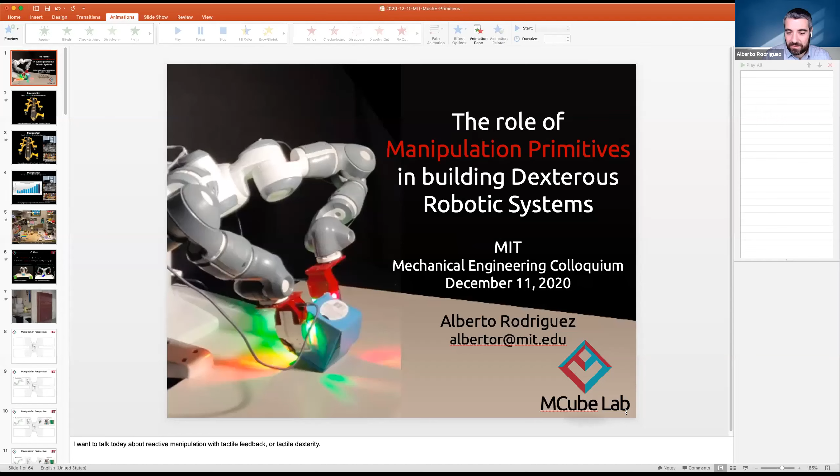All right. Thank you, everyone, for joining. And I hope that you are as excited as I am about the end of the semester, how close we are. And I hope that you all have some time to recover energy through this well-deserved break that is just around the corner. So today I wanted to have a chance to talk a little bit about manipulation.

I will show some of the latest work that we've been doing in my group in the MCube lab. And before that, I will also spend a little bit of time talking about manipulation in general, my perspective on where we are as a community and some directions that I think are important to explore. In particular, I will talk about manipulation primitives and the role that I think they ought to play in building dexterous robotic systems.

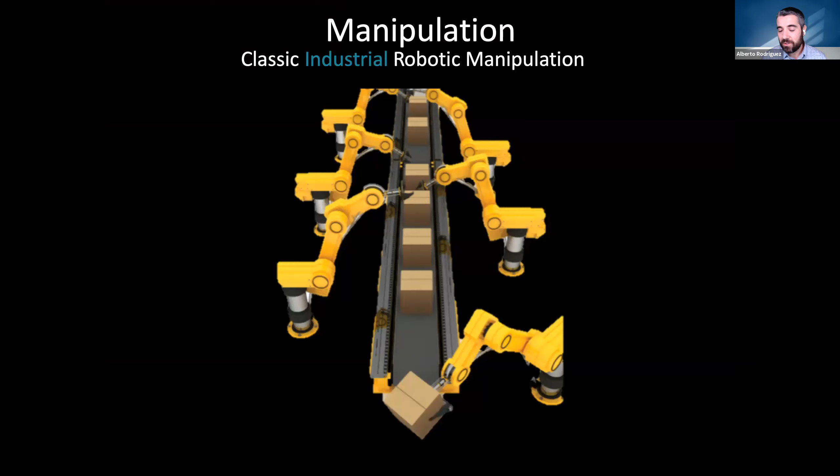Okay, so robotic manipulation, if we look at classical industrial applications, has for the most part been exploited or understood as the idea of picking up objects one by one and putting them from here to there in a very precise way and with high efficiency, but still moving objects one by one.

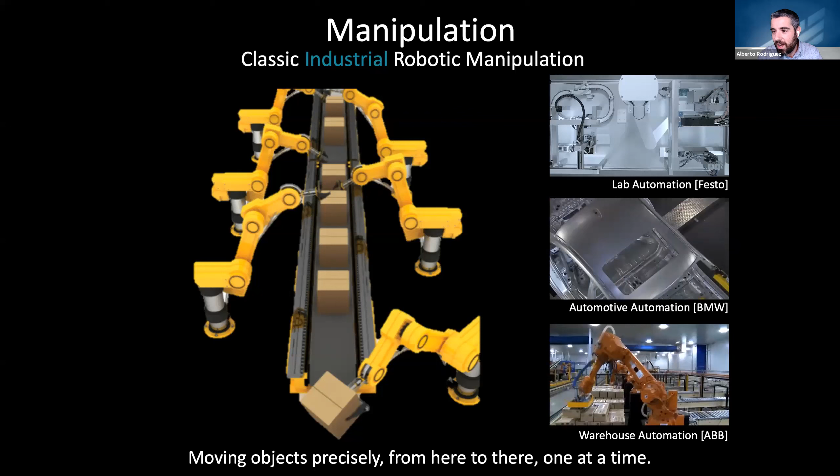So here are some examples in the context of lab automation, automotive automation, and warehouse automation, where in all of them, the idea is that these robots are doing almost exactly the same thing all the time.

And this perspective has been extremely successful, right? So we can see here an example, the continuous rise of the number of robotic arms that have been sold in the last decade or more, and it's like a healthy curve.

And while it has been extremely impactful, I think that the idea that we have in our head when you think about manipulation is quite different from the way that these robotic systems are developed or implemented. And one key question is why that's the case? What leads to this particular approach not generating the smooth, flexible, and graceful behavior that we see when we, for example, use our hands?

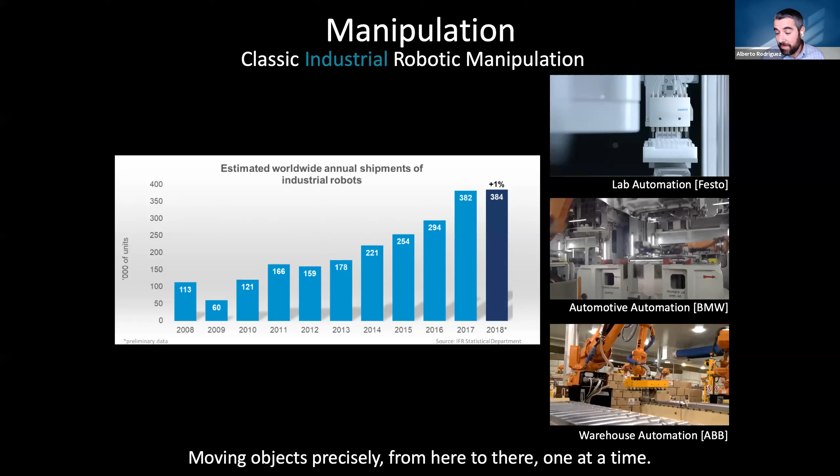In a scenario like this, it's rarely the case where we see two instances that are exactly the same, where you can execute the same behavior. So there's a gigantic amount of flexibility in the way that we're interacting with objects here. And not just flexibility, but it is something that is rewarded, something we seek. The creativity that comes with using our hands in creative ways to bend the world to our will. To me, that is what manipulation is.

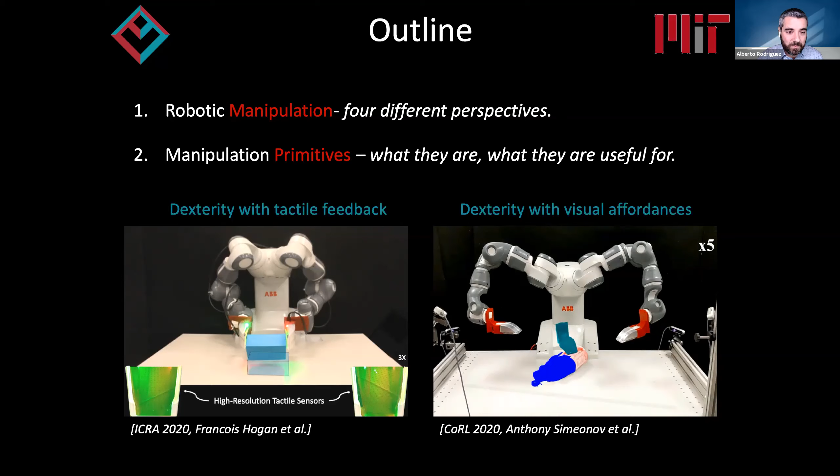I also want to talk about the role that manipulation primitives play in integrating these different perspectives. Then I will describe that in the context of two recent research lines that we've been developing in the MCube lab. Okay, let me move forward.

How come I can do something like this in a completely effortless way without having to think about it, but at the same time with so much grace—not just me, but anyone. When you try to analyze this problem, there's very large complexity in trying to replicate something like this. So today I wanted to use the same example to illustrate these four perspectives.

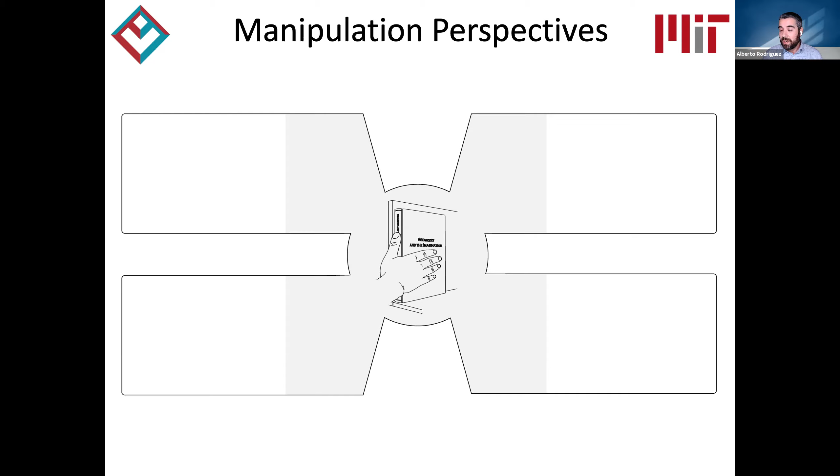So for example, one perspective that the community has embraced is to think about it from a mechanical perspective—from a mechanics and control perspective. We make simplifying assumptions about the geometries and about the laws of mechanics that explain the interaction between the end effector, in this case my palm, and the book. Maybe I can think of my palm as four points or a plane, and the book also as a plane, and it's the interaction between these two planes and maybe a Coulomb friction law.

That I use as a reduced model to then be able to control in a feed-forward fashion the interaction. How do I generate trajectories that bring my simplified representation of the mechanics through the underactuated control that I get from having to exert forces through contact? So that's a significant perspective that has been embraced by the community at large for many decades.

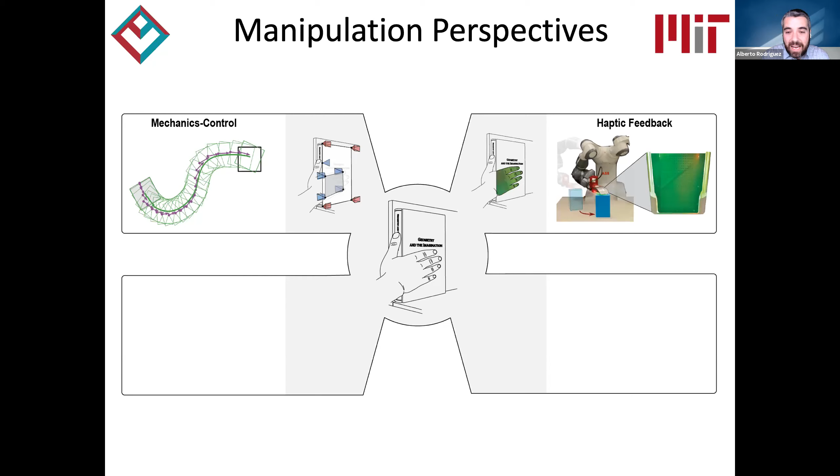But you can also think about this problem of the interaction between the palm and the book from a haptics perspective. Someone might say, well actually what matters here—forget about the model of the mechanics—unless I have the ability to exert forces. If my mechanics tell me yes, you should contact here and exert this force, I don't have the ability to exert that force unless I care about the haptic interaction. How do I render forces through this very complex interaction between a soft object, which is my hand, or semi-soft, and a rigid object that is the book.

A significant part of the community has also thought about manipulation from that perspective: how do you render forces in a highly complex or unmodeled environment? Now we can also think about this problem from a planning perspective. Someone can say actually what really matters here, where the complexity is, is in generating a trajectory, a sequence of actions that bring the book from between those clearly different strata where it's going through.

So first, the book is sliding on the wall, and then it's sort of pivoting maybe about the edge of the shelf, and then finally it's in the grasp. How do I chain a sequence of long horizon decisions that bring the book through that trajectory?

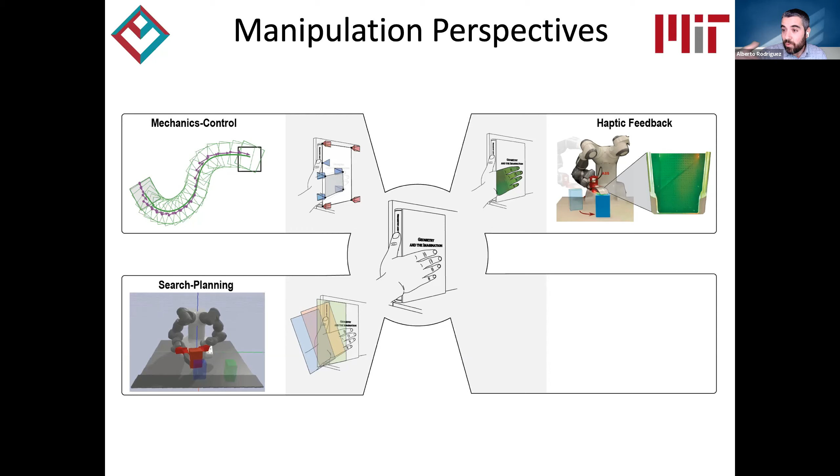And then someone else might say, actually, what really matters about this is that the book is a physical object that lives in the real world, and I don't have a model for it. It's just the perceptual, the visual perception that I get through my eyes. And what tells me that the side of the book is a good place to put the palm, or that the edge of the book is a good place to put my thumb? And definitely that has also been a perspective that has been embraced lately with higher emphasis in the robotics manipulation community.

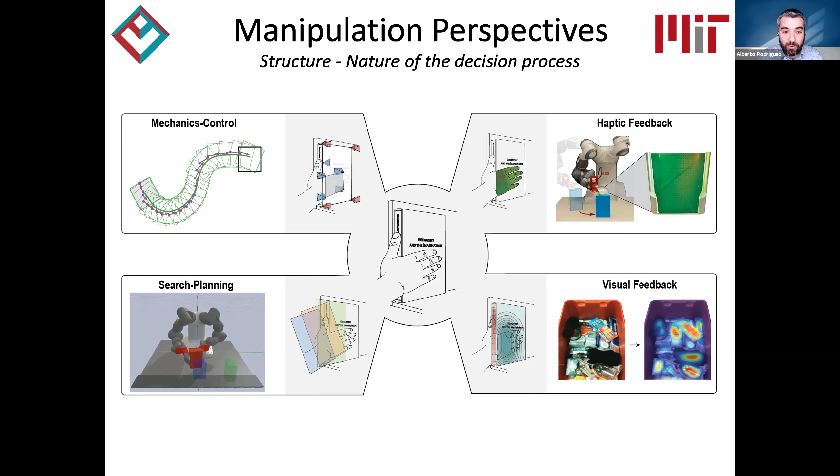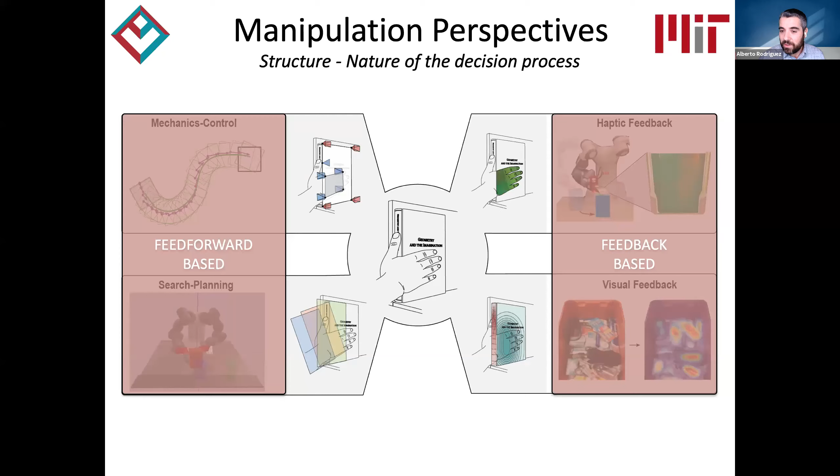Now, you might be thinking, I'm really not saying much new here. So these four perspectives are classical in robotics, and we can structure them, for example, by the nature of the decision process. So here we're just saying that, well, maybe we're just thinking about it from a feed-forward perspective. So I have a model that I can simulate forward, and that is what allows me to make decisions about how to generate behavior. Or I can think about it more from a feedback perspective. So it's in the sensor space where I make my decisions, that's where the information lives that allows me to make those decisions.

Or I can think of this structure from a local versus global perspective. So I might be caring more about the fine-grained interaction between the end-effector and the book, or I might care more about the global state of the task that I'm executing. So there's clear structure associated with these perspectives.

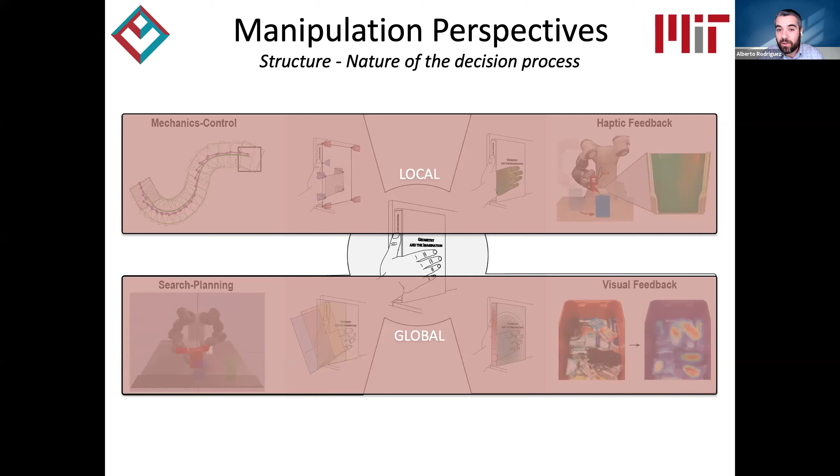I might also structure them from the nature of the challenge that they address. So each one of these perspectives acknowledges that there's, or gets excited by, certain challenging aspects of interaction. So you might get excited by the underactuated and hybrid frictional dynamics that are involved in transmitting forces through contact. Or you might get more excited by the generality that comes from creating long horizon behavior.

So you more naturally would tend to think about a search planning perspective. Or you might get more excited by the challenges involved in generating real forces, in rendering real forces and velocities at contact. Or from the challenges involved in having to manipulate real worlds, where the perception comes from vision.

Or finally, we can also structure these perspectives from a time perspective. So from the nature of the dynamics of research, of how our ideas or ideas in the community evolve over time. We can think of maybe robotic manipulation sort of originating, and actually a lot of the work in this department, in the area of mechanics and control.

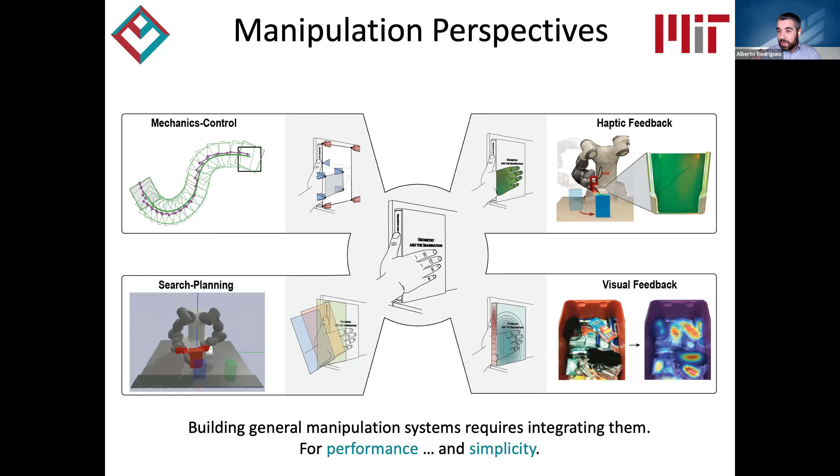Building general manipulation systems requires thinking about all of these at the same time, for performance but also for simplicity. This is where manipulation primitives come in, because by focusing the analysis on specific interactions, they allow us to find synergies between these perspectives and exploit them.

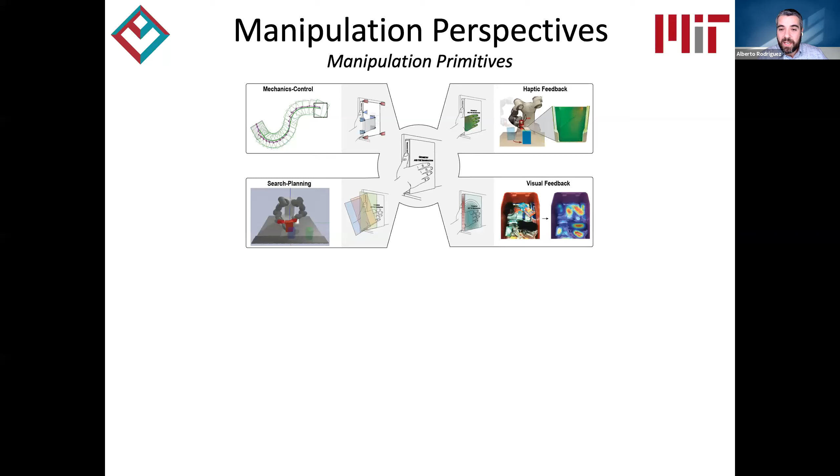All of these are just to put an idea or image of different ways that we can think of interaction, that we can think of generating autonomous behavior through contact, leading to the description of what role manipulation primitives play in solving this challenge. So what's a manipulation primitive?

By focusing on one particular type of interaction, this has naturally allowed these different perspectives to evolve and find implementable solutions. But I want to argue that they also facilitate integration, and that's what I'll go into with two examples of current research in my group.

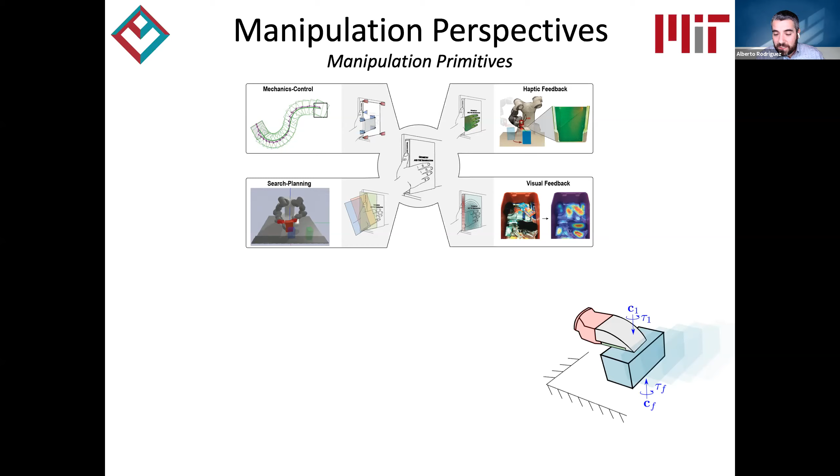If we look at one example of a primitive, let's say pulling an object - what is a primitive? It's an assumption on the contact interaction. In this case, it's a palm contacting an object on top of the object, and the assumption we're making is that the palm is going to be sticking to the object.

That sticking interaction comes with benefits in terms of simplified mechanics and a simplified forward model for the object motion. If I'm making the assumption that there's this rigid sticking interaction between the palm and the object, that reduces the complexity - I can think of the mechanics of the interaction as some form of quasi-static equilibrium. It's the friction between the object and the palm, and the object and the ground, that will eventually determine the motion of the object.

But if the object is sticking to the palm, the force resolution is simplified. From a controls perspective, I can then assume that the motion of the object is a fully actuated kinematic trajectory. I don't need to reason about the hybridness or underactuation involved in transmitting forces through contact, because I'm precisely making that assumption that the object is going to stick to the palm. This also allows us to get simple models on the reachability of what it is that I can achieve with this primitive.

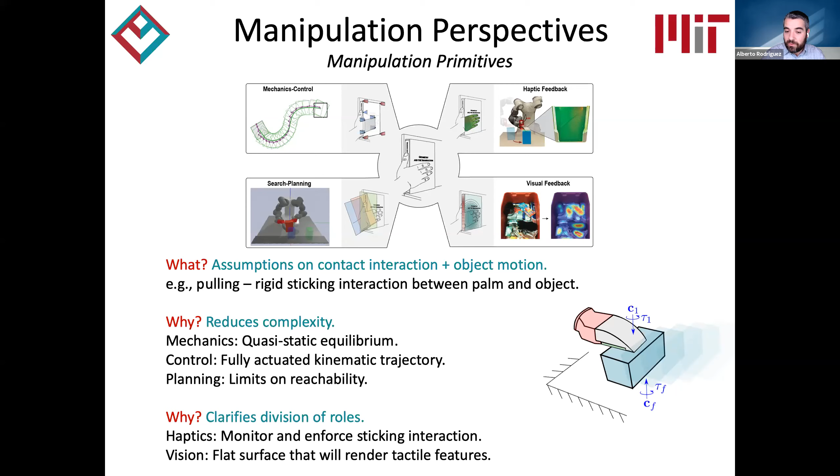And on the other hand, it clarifies the division of roles. If this primitive makes an assumption on the type of contact interaction - maybe a rigid sticking interaction between the palm and the object - then I can directly say that the role of haptics is to monitor and enforce that sticking interaction. I need to develop a haptic controller that makes sure this assumption is satisfied. Then the role of vision is to find places to interact with this object that make it possible for the haptic controller to do its job - in this case, rendering sufficient information to know whether it's sticking or not.

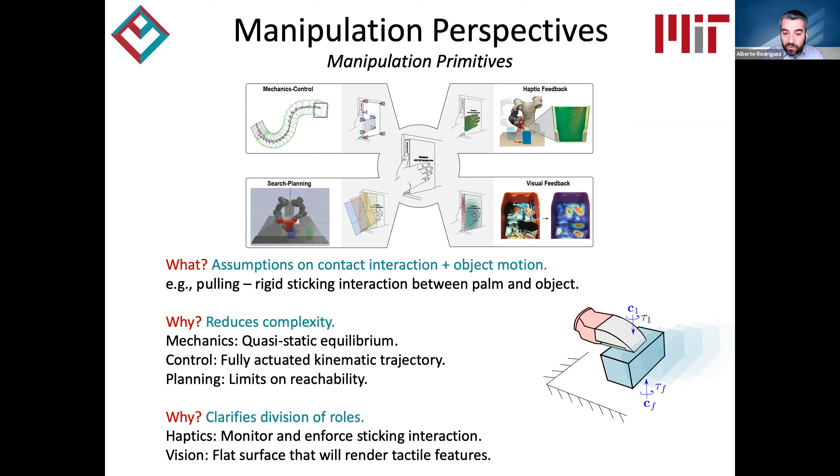So on one hand, it can reduce complexity, and on the other hand, it clarifies this division of roles. So I want to get deeper into this relationship between defining primitive interactions between an end-effector and an object that we're manipulating, and finding integrations between these different perspectives.

First, I will describe recent work that we've done in trying to integrate haptic feedback with mechanics and control, the idea of integrating tactile feedback in dexterous manipulation. So how do we generate dexterous behavior that can consume tactile feedback in real time, and generate reactive behavior?

So dexterity with tactile feedback. The idea is that we want to embed tactile feedback in the mechanics, in the models of mechanics that we use for generating dexterous manipulation. And we start from the definition of what the manipulation primitive is, which is a certain assumption on contact interaction and some expectation on the motion of the object.

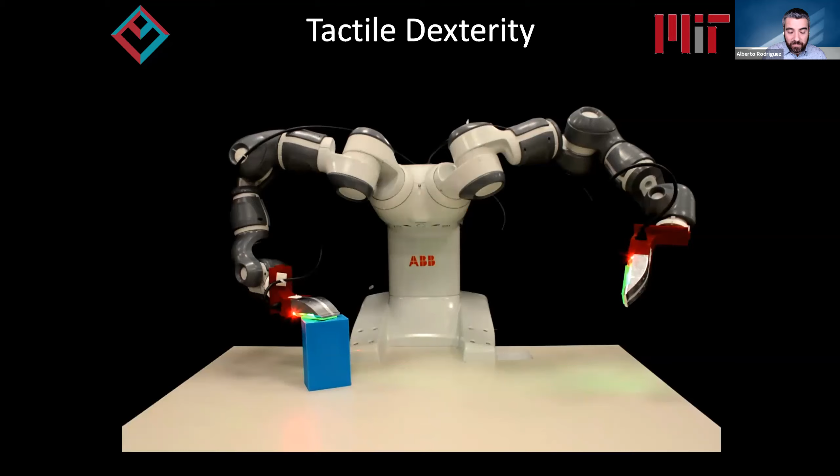The first system I want to use to illustrate this framework is a dual arm system with two palms that have tactile sensors integrated. These are tactile sensors based on GelSight technology. The basic idea is there's a camera inside the palm that is looking at the deformation of the skin of the palm.

By looking at the deformation, we can see either the geometry at contact, or we can estimate the contact forces at the interaction.

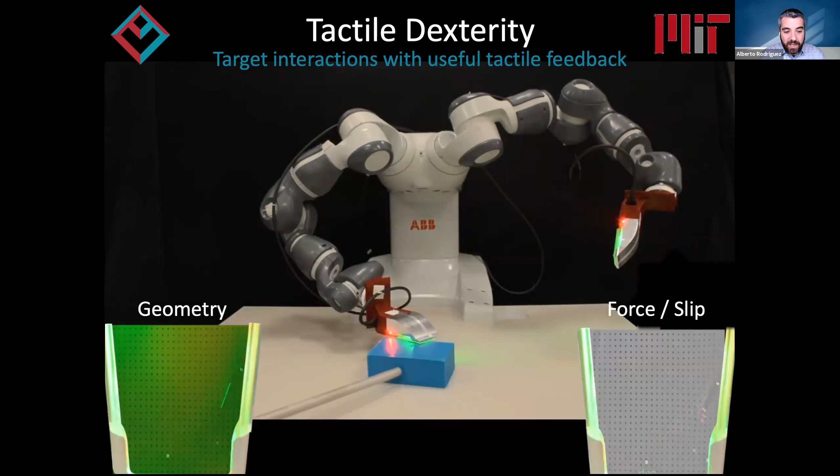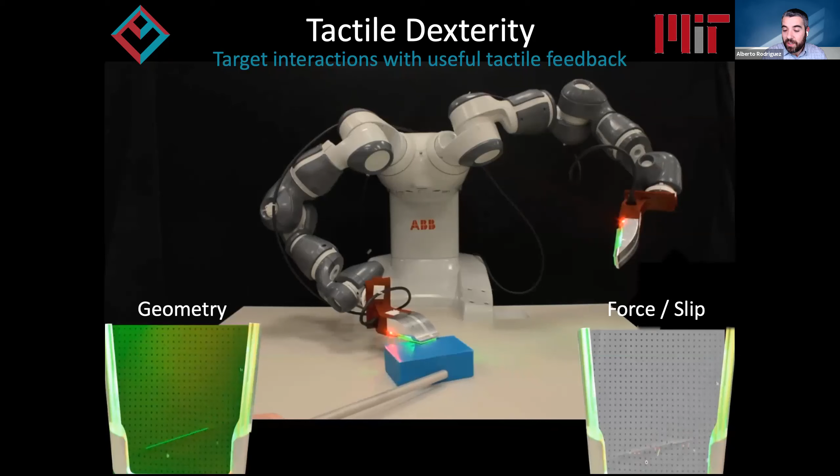Here's an example showing how, in this case, we're just moving the object. On the left, you can see how we estimate, as a simplified scenario, just a line as an edge of the object. On the right-hand side, we can estimate the stress or shear forces on the skin of the sensor, and with that, understand whether it is slipping or not.

So we can think of this problem: if the goal is to bring the object to a particular configuration, in this case the blue box, to the shaded blue box, how do we generate motion for the robot arm? This is a hierarchical problem where we need to think about generating arm trajectories that move the palm, and then palm trajectories that move the object.

Now I'm going to focus just on the interaction between the palm and the object. The idea is that this is the same primitive we described before, just pulling the object, and we're going to assume that the palm is going to stick to the object.

So the contact state controller on the right will be in charge of tracking whether the object is sticking or sliding on the palm. And depending on whether it's about to slip or not, it will control the normal force, or the force that is applied to the object.

On the left-hand side, the role of the object state controller will be to generate trajectories that bring the object to the shaded blue box, based on its current estimate of where the object is, and based on the assumption that the object is going to stick to the palm. Because it's making that assumption, it can do faster planning.

So on the left-hand side, just the object state controller, we see that the moment we're perturbing the object, the arm is replanning to try to bring its current best estimate of where the box is to the shaded blue box. On the right-hand side, the palm is estimating in real time whether the object is slipping, and if it's slipping, it's applying higher force.

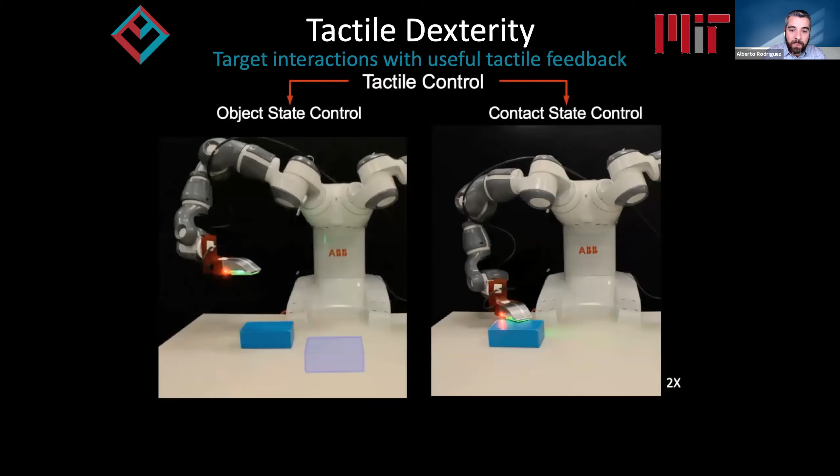And it is this contact state controller that is interesting from a primitive perspective, because we can think of it in generality. We can think of what it takes to enforce a certain kind of contact configuration.

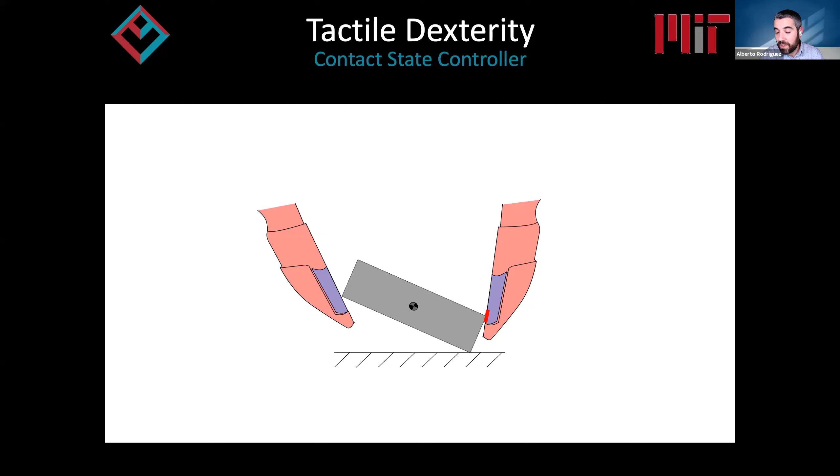Imagine here that we have a primitive that is making a certain assumption about the multi-contact configuration between the object, the environment, and a certain number of fingers. In this case, there's 2 contacts between 2 palms, and there's 1 contact with the environment.

The goal of this controller, in the case of this primitive, would be to try to maximize the stability of this contact configuration and prevent any of the contacts from slipping. So we derive a model of the stability of this particular contact configuration.

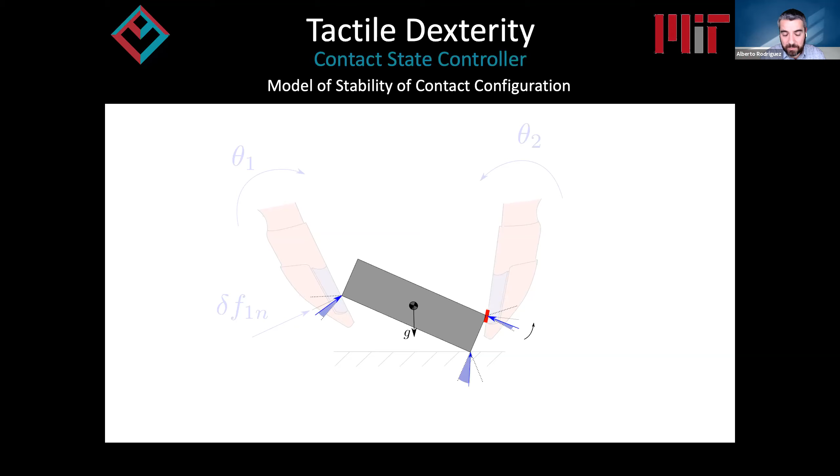So those are the decision variables, and we want to find which update we have to do to those decision variables, subject to certain constraints. And the constraints are classical within manipulation: we want to make sure that we satisfy force equilibrium, that the contacts can sustain the external wrenches, like gravity, or other known external perturbations. At the same time, we want to impose Coulomb friction cone constraints, so that contact forces can only push, and they have to live inside the friction cone so that it sticks.

So if we were able to solve this optimization problem in real time, we could generate a behavior that feeds from the tactile information. In this case, it would tell us which one of the contacts is in higher danger of going to the other side of the edge of the friction cone, and we could increase its weight in this optimization problem, and then resolve these in real time.

Unfortunately, this optimization problem is difficult to solve in real time because the margin, as defined here, is a trigonometric function, so it's not convex, and the equilibrium constraint is bilinear because we are changing both the contact forces, as well as the Jacobians of the contacts.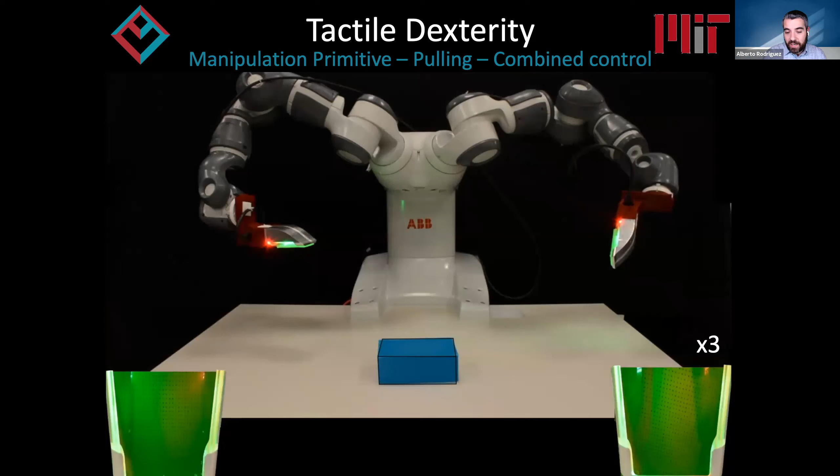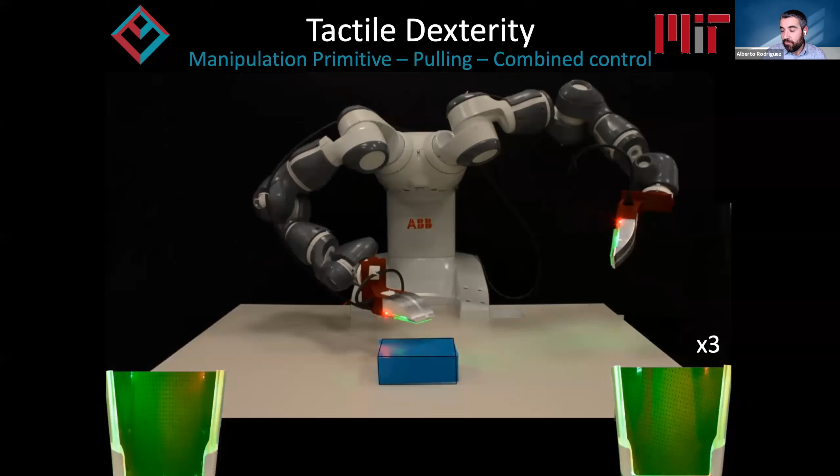So here we've told the robot that it has to maintain the object in that center position. By combining these two controllers, one controlling the downward force and another controlling the trajectory of the object, we create this reactive regulation behavior, which we can then put in the context of a trajectory planner capable of sequencing primitives, so we can tell the robot to bring an object from one configuration to another in a reactive fashion.

And again, one of the key enablers that allowed us to do this fast enough to consume tactile feedback is that we restricted interaction to only some primitive modes of manipulation interactions that, on one hand, had simple controllers, so we could run them fast enough to recompute object trajectories, and that generated tactile feedback informative enough to understand if the contacts were slipping or not in real time. So using primitives was essential to make the connection between these two perspectives.

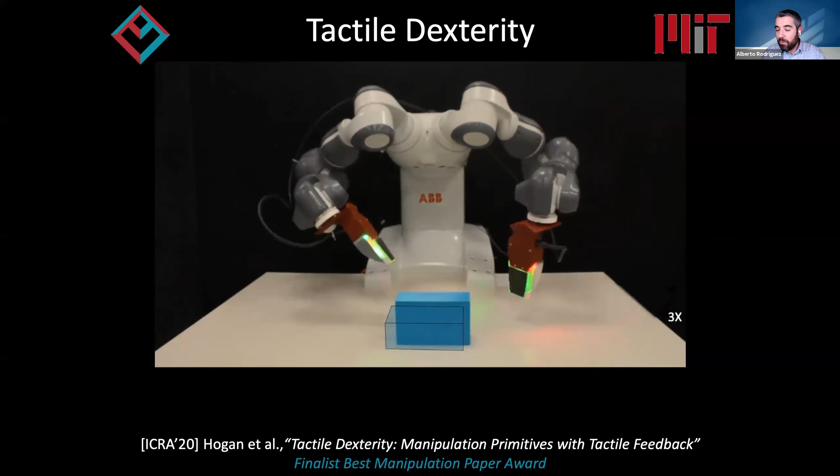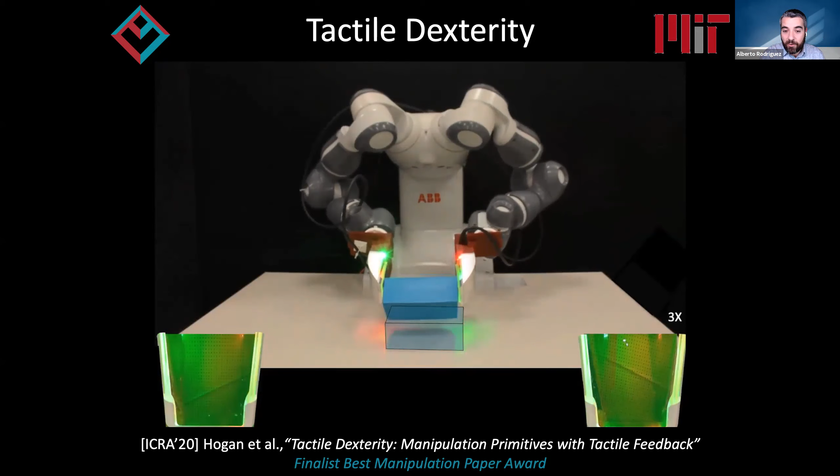Desired reconfiguration. It doesn't use vision integrated into the loop. And it needs to know a geometric model of the object so that it can interpret the tactile cues in the context of the actual geometry of the object.

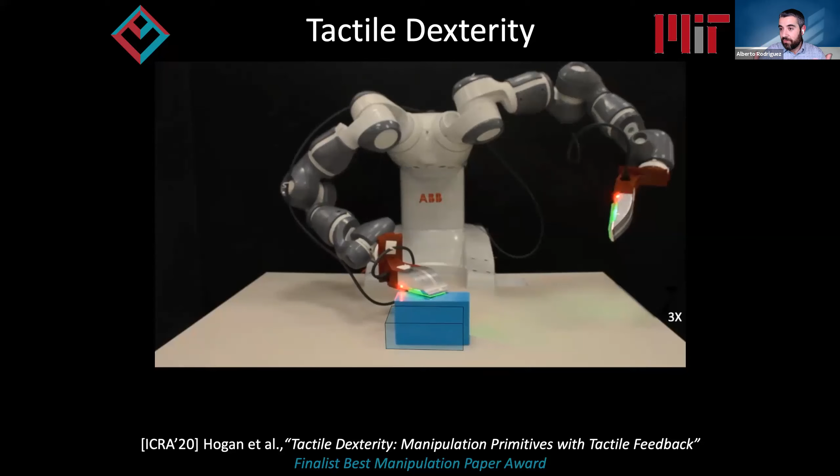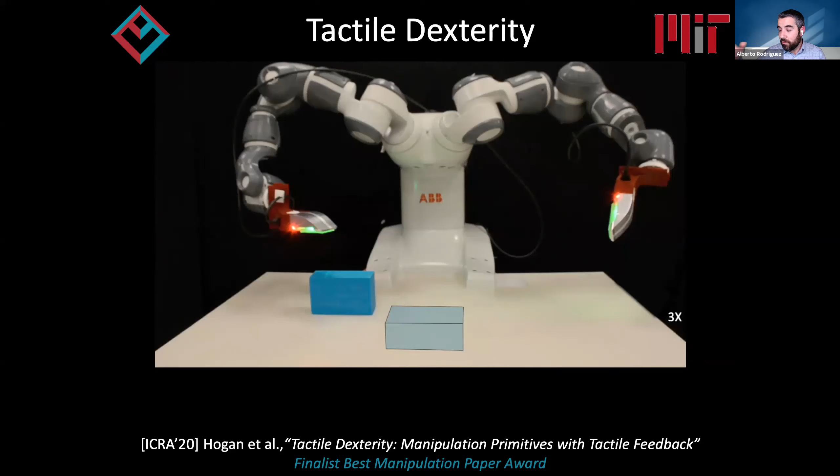And in the second application that I will show soon, we will solve the opposite problem, which will be using visual feedback instead of tactile feedback. But before that, I just wanted to show quickly another example of a system where we've also implemented this composition of tactile dexterity into two controllers, one controlling the contact interaction and the other controlling the object state.

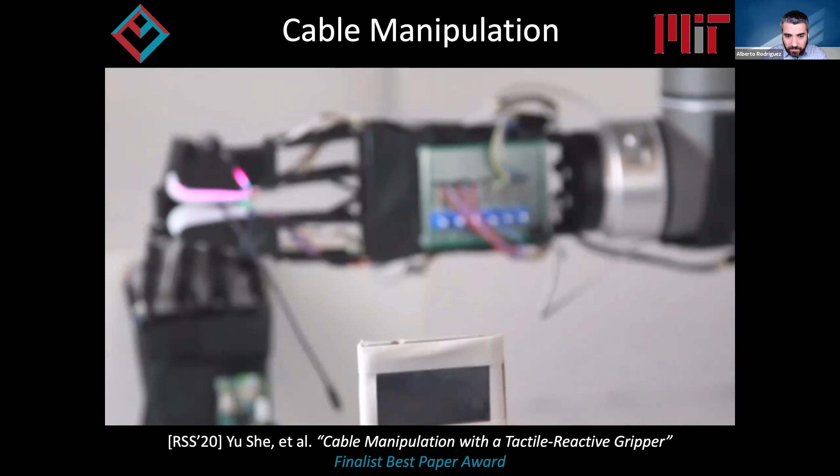Just to illustrate that it's not just restricted to imposing sticking configurations, but it can also be used for allowing objects or fingers to slide on objects. This is a very different task. The idea is that we want to manipulate cables and do it in an efficient manner. This robot is tasked with grabbing a cable and then sliding its fingers along the cable.

Classical approaches to tackle this problem have been heavily biased or focused on a visual perspective, a visual pipeline, where you have a vision processing pipeline capable of estimating the full state of the rope or cable, and then plan motions for the arm to manipulate the cable based on that state. But in reality, that is not necessary. The interaction between the gripper and the cable is very local in this case.

So we set out to demonstrate that it was possible to do that task just with tactile feedback. And the key is to run two controllers that work in combination, like in the previous case, to make the task simple enough that it's possible to do it with a simple model of the mechanics of this task. So let's see how this works.

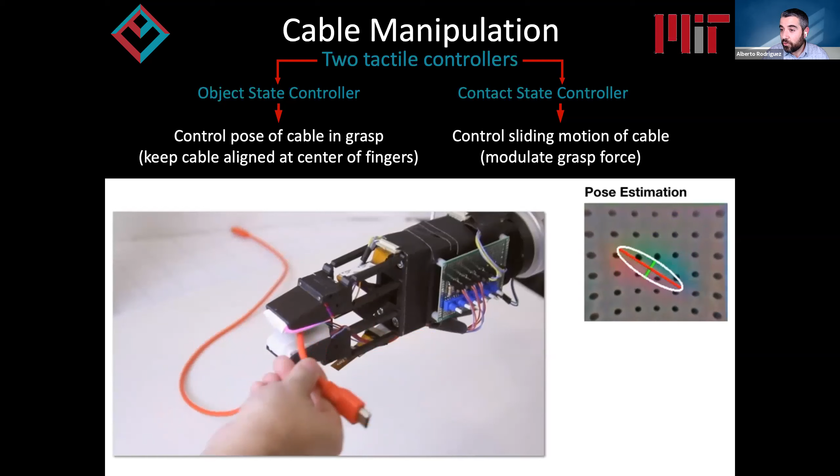So we have a simple model of the cable-finger interaction dynamics. On the left-hand side we have a fixed gripper grabbing the cable, and on the right-hand side the finger that's pulling the cable. We model this as an underactuated pulling system: if the cable is in this configuration, we want it to go back to center and be horizontal. That's impossible directly because it's underactuated, but we can work through the underactuation by planning a sequence of pulling motions so it eventually goes down, almost like parallel parking with the cable.

So we learn a linear model of the dynamics, the interaction between the finger and the cable, and then just use an LQR controller to control it. That might seem too simple to model the complex interaction between two deformable objects with high friction, but the trick is that the contact state controller acts as a regulator, making sure the interaction stays within a certain working point of friction. If we run this contact state controller fast enough, it ensures the friction as the cable slides stays within a certain threshold—not too small, not too high. By doing that, the interaction dynamics between the cable and fingers are simplified in their range of possible behaviors.

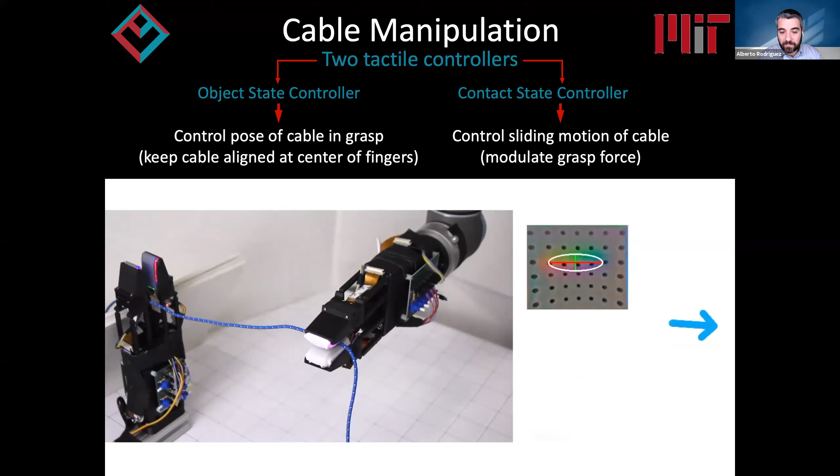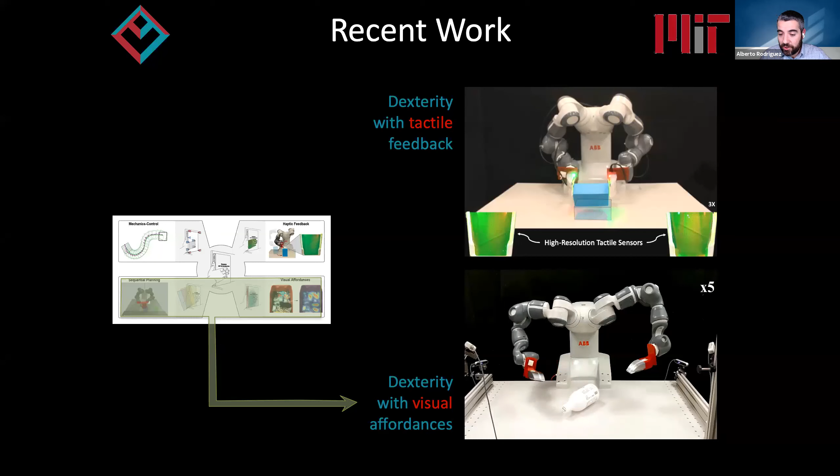Last, I wanted to show briefly another piece of recent work we've been pushing forward over the last year or so. This is work in collaboration with Pulkit Agrawal and Josh Tenenbaum. The idea is to combine planning with visual cues, or a visual affordance space—a visual cue space. We see an object for which we don't have a model, and we still want to manipulate it, doing a sequence of operations to reconfigure it. I may not have time for a full explanation of this project, but I at least want to show the motivation behind it.

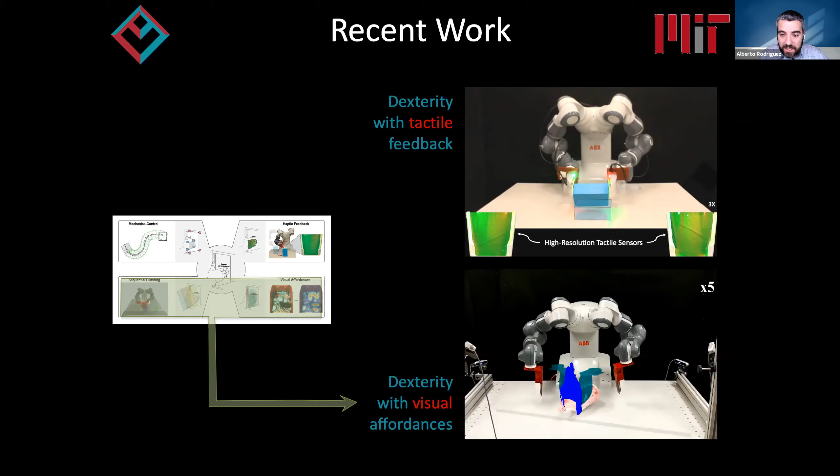Again, it's using the idea of using different manipulation primitives for which it has learned perceptual models to understand which objects in the scene are graspable or which are suctionable, but without having to estimate the pose or exact geometry of the objects. So this is what we call working in perceptual space. There are cues that come out of the local geometry or appearance of these objects that trigger certain behaviors, or there are affordances in the perceptual space for certain primitives.

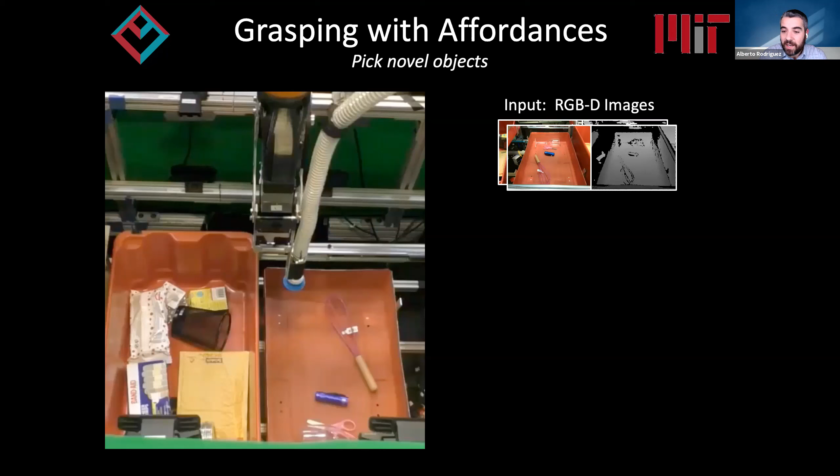So we get an image in the form of an RGBD image, RGB plus depth. And then we've learned affordance models with convolutional neural networks to predict which of these locations in space are good locations to suction or grasp objects in particular orientations. After looking at this heat map that represents the affordance in perceptual space, we find the point with the highest score.

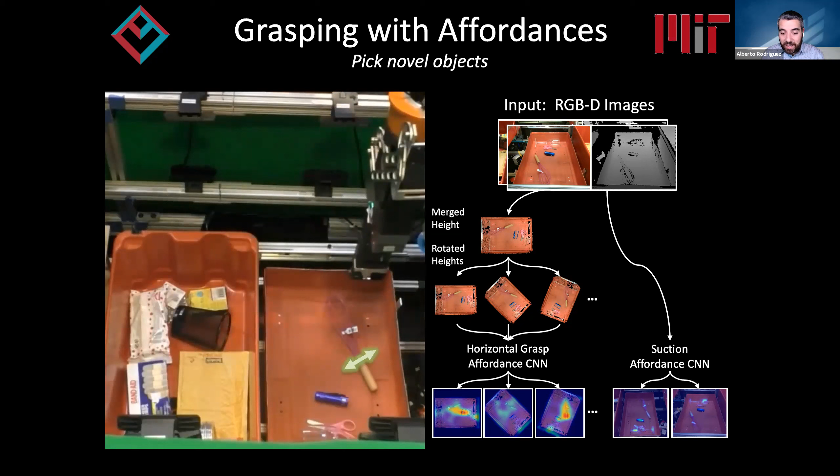That means that's the point most likely to be graspable in this case. So we pick up that point, and the robot has never picked up that object before, but nevertheless it picks it up in a correct orientation, by the handle. Why? Not because it has any notion of objectness, but simply because the local geometry in that part of the space corresponds with what it has learned before to associate with successful grasps. So that's what we call an affordance of that particular grasp.

This is a perspective or approach that has been embraced significantly in the last decade, I would say, because the rise of convolutional neural networks has made it possible to learn complex affordance models from lots and lots of data, outperforming many systems that do some form of explicit state estimation—that first try to estimate the global geometry of the object and its pose, and then based on that generate a plan for grasping it.

So this is something that has been embraced by the community and lives in the fourth quadrant at the bottom right that I described in the four perspectives. But there's one clear caveat, which is that by planning or executing motions directly in perceptual space, we've limited ourselves from being able to do sequential planning, like the perspective we had in the bottom left corner of the four perspectives.

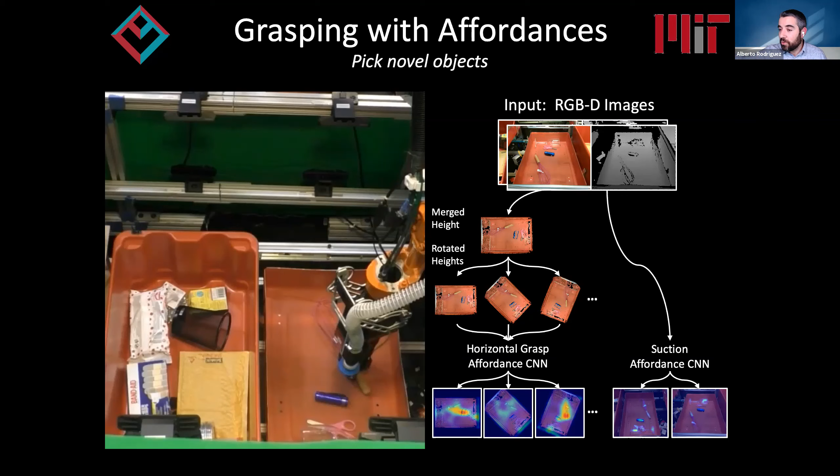We don't have the ability to simulate how the system or what the state will be after we execute one action. So it is difficult to decide which two actions to do in sequence if we wanted to do a few actions in sequence.

In the last couple of years, we've looked at different ways to explore synergies between different primitives that are executed in sequence, like pushing and grasping objects, where we show that a system is capable of learning when to push and separate objects so that it can then grasp them, or how to grasp objects so that it can then toss them into particular boxes, exploiting the synergies between these primitives.

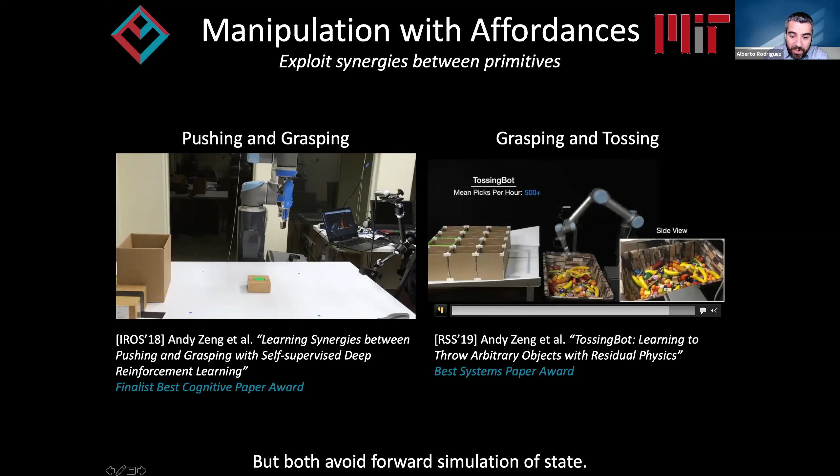But in both cases, these two systems are explicitly avoiding doing any form of forward simulation of state. So when this system was pushing this block to the right, it did not have an idea of how the image or the state would look after pushing it. It just had learned that in the long-term, that was something useful to do, and that on average it would lead to objects ending up in a more graspable configuration. But it doesn't have the ability to simulate forward the state, how the image will look after executing it.

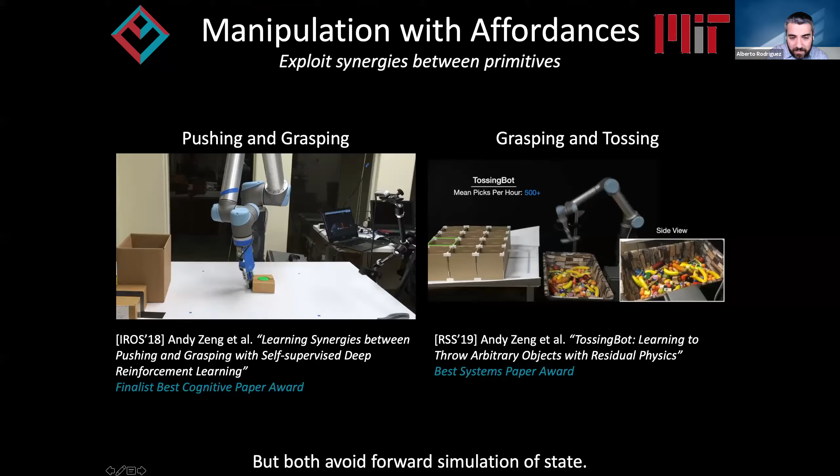So that has clear limitations, which the community has been trying to explore. There's been a lot of work in the last few years on visual foresight, trying to learn models that predict what the camera will show, what the image or video will look like after executing a certain action.

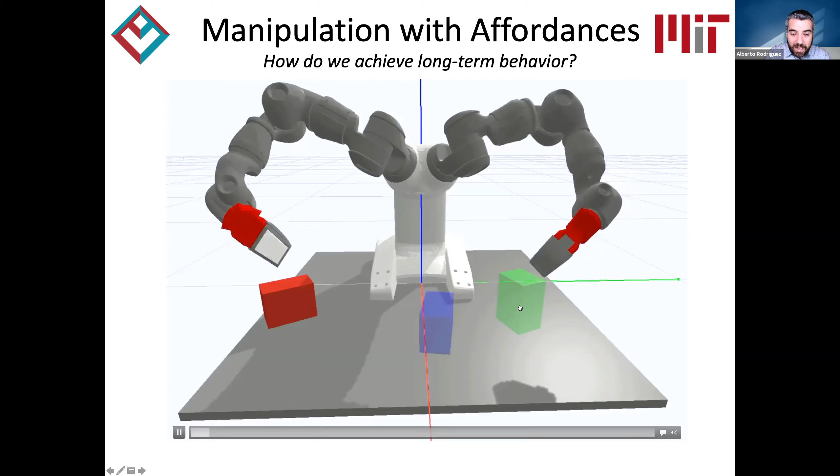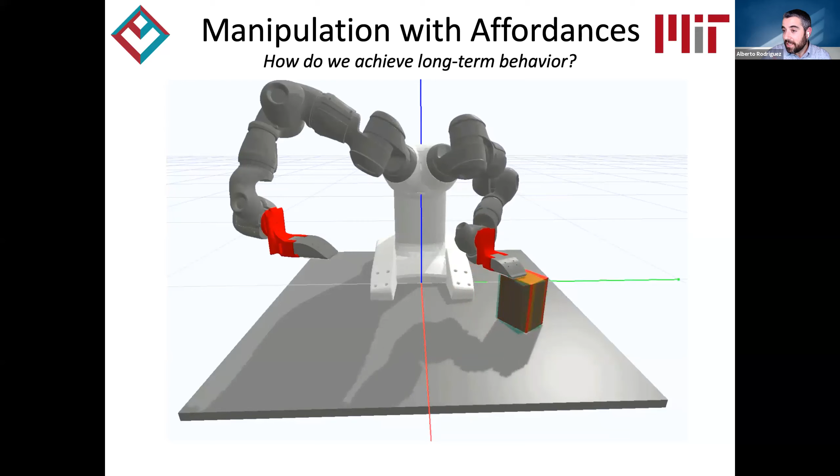If you want to solve a problem like this, where you have a red box and you want to bring it to this configuration with some kind of motion, where you first do a pull and then have to do a regrasp to bring it to a different manifold of states, and then bring it all the way to the other side of the table, you need forward prediction of how the state will look to generate this sequence of primitive interactions. So long horizon planning requires some form of forward model to predict what the state will look like after each interaction.

One key question we've been interested in is how do we do this while the behavior generating each primitive interaction is still triggered with affordance models that can generalize to more complex objects.

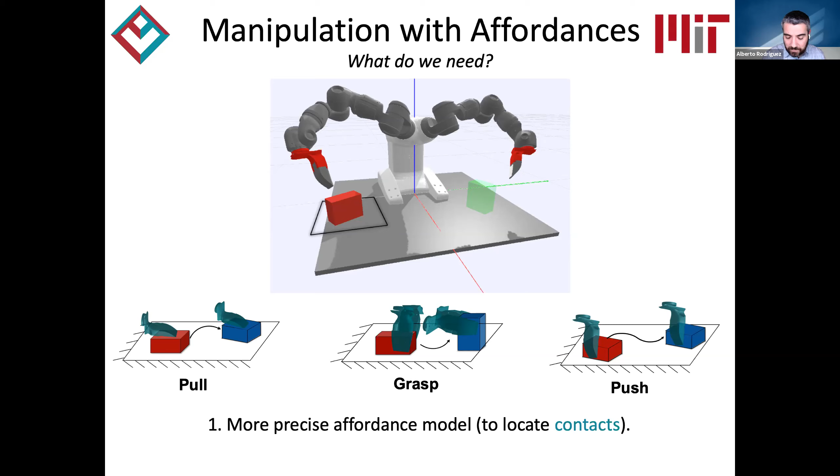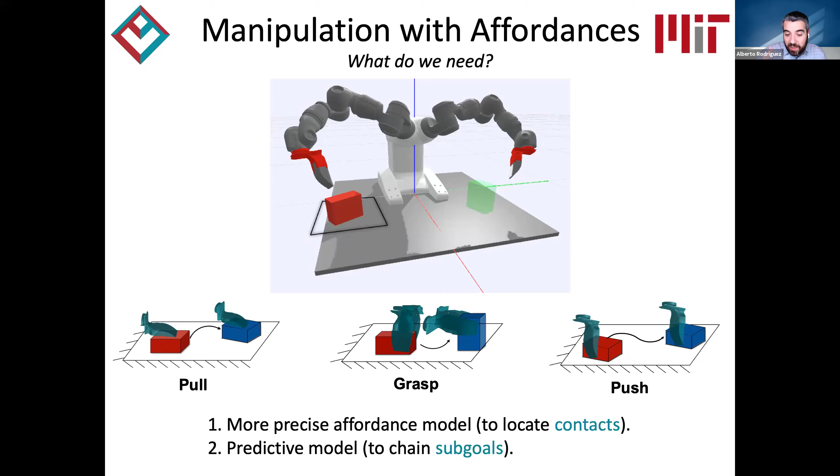So if we want to manipulate with a palm, where to put exactly the palm and in which orientation, as well as a predictive model that allows us to fast forward time to see what the state will be like, so we can chain subgoals. We need affordances to predict contacts and to predict subgoals, and we can do that by learning explicit models of this new generalized version of what an affordance is.

We give it a representation of the state or of the object we want to manipulate, and it makes predictions both of where to put the palm, the contacts, and where to bring the object, the subgoal. We can do this because we're representing state as a point cloud, and because we're using primitives restricted to sticking interaction.

It's the combination of these two things that makes it possible to do simple forward propagation. It's just cropping a part of the point cloud and manipulating it as if it were that particular primitive manipulating that part of the point cloud, instead of a model of an object. It still captures enough of the geometry of the world that we can hypothesize where to put the palms or the end effectors.

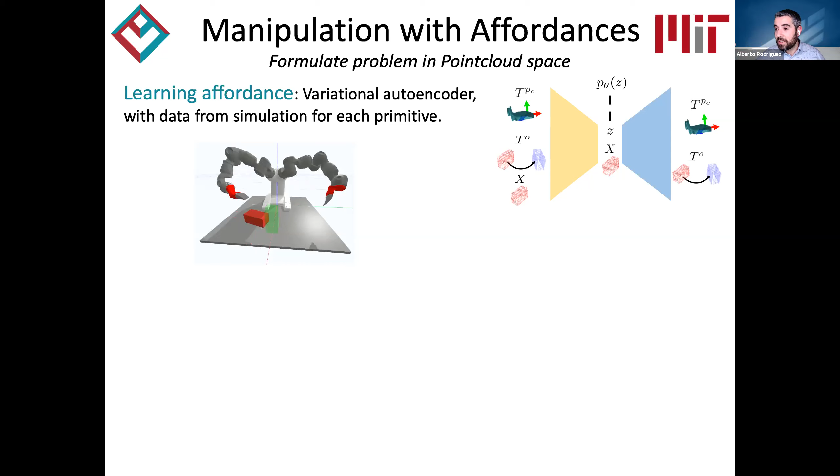So we learned that with a variational autoencoder, and we generate data in simulation by manipulating many different objects, all of them cuboids in this case. But because we're learning these as affordance models, it naturally generates a certain generality to a slightly bigger set of objects that are not just cuboids, as we show in a second.

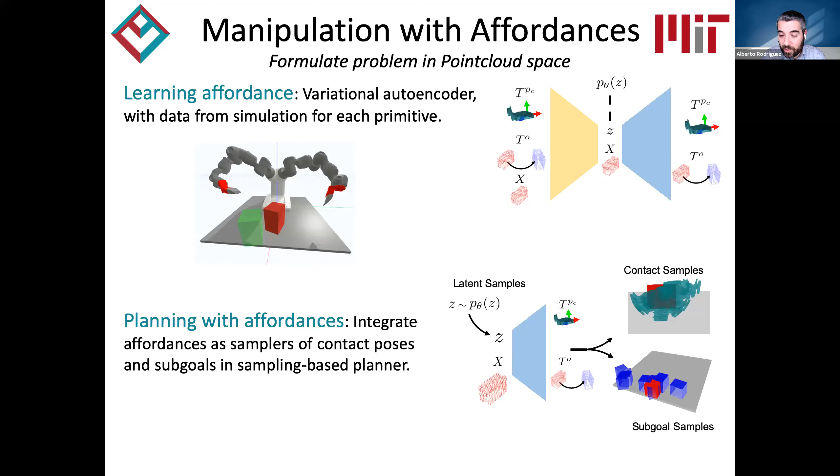Then we use this model to directly generate samples and subgoals, which we then integrate. This is a more detailed description of what it means to do this in point cloud space with a graph attention network, and we integrate it into a sampling-based planner.

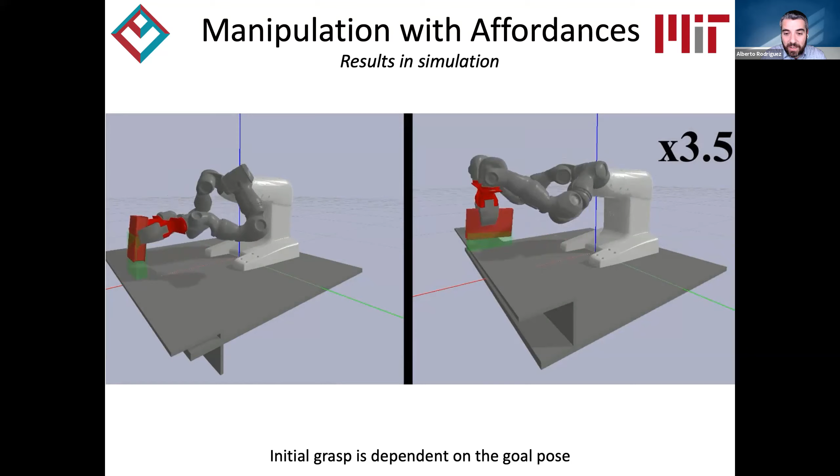So this is a book, and the robot is tasked with putting it into a shelf. But the robot doesn't see a book—what it sees is just a point cloud, which we render in simulation. It's still capable of choosing the right grasp to pick up the book and put it back into the shelf, within the kinematic reachability constraints of the platform we're using.

It's compatible with long planning sequences. In this case, we've told the robot it has to pull the object to the right, then grasp it to reorient it, then bring it to the shelf and put it in place.

But we haven't told it exactly how to do it, or where to contact the object, or how much to, or where are the subgoals inside this long chain. It uses the affordance model of the primitives that it has learned in simulation to come up with a plan like this. The key contribution is that it doesn't know the model of the object. It's just manipulating a part of the point cloud that it's seeing.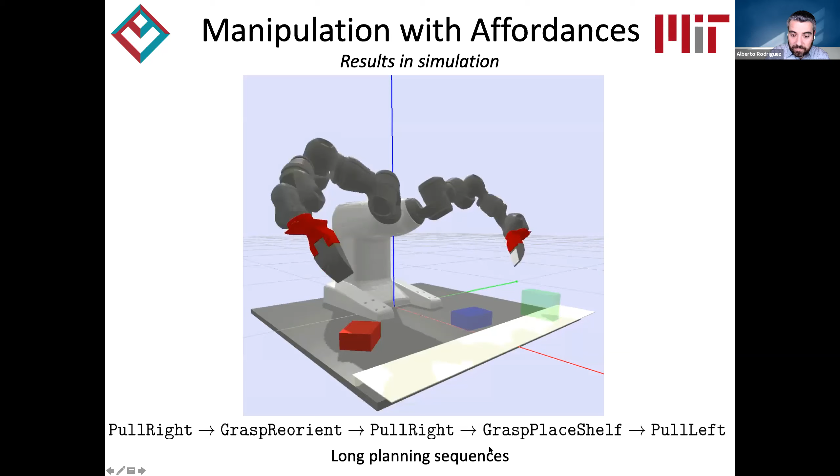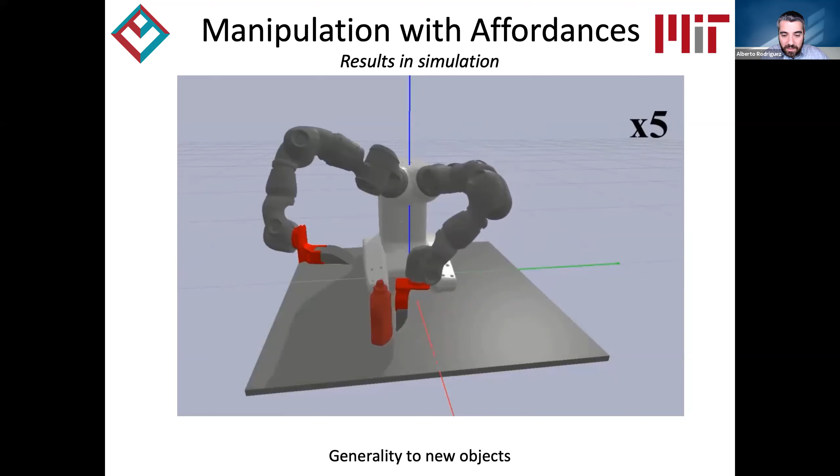Because of that, it has some degree of generality to objects that are not cuboids. In this case, it's planning the same thing but with an object that in point cloud space looks like this mustard bottle. It has an easier job directly translating to real objects, because now the point cloud is coming from a real camera, but the point cloud representation looks quite similar to the simulated one.

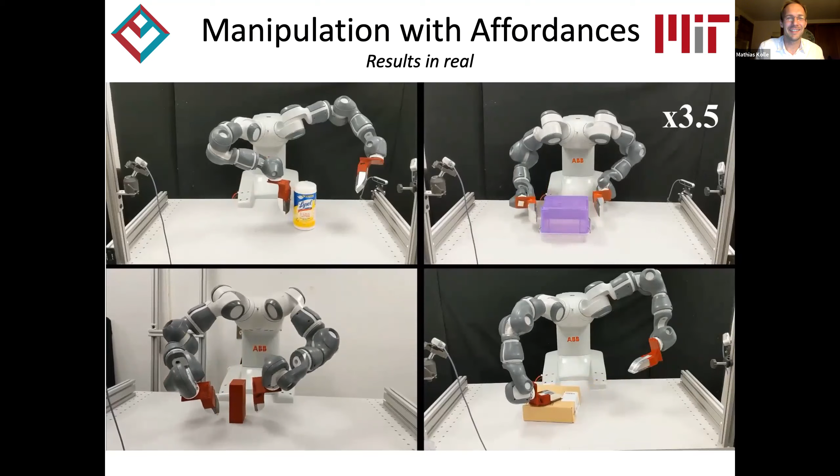Here's just one example that I showed earlier with a two-step plan.

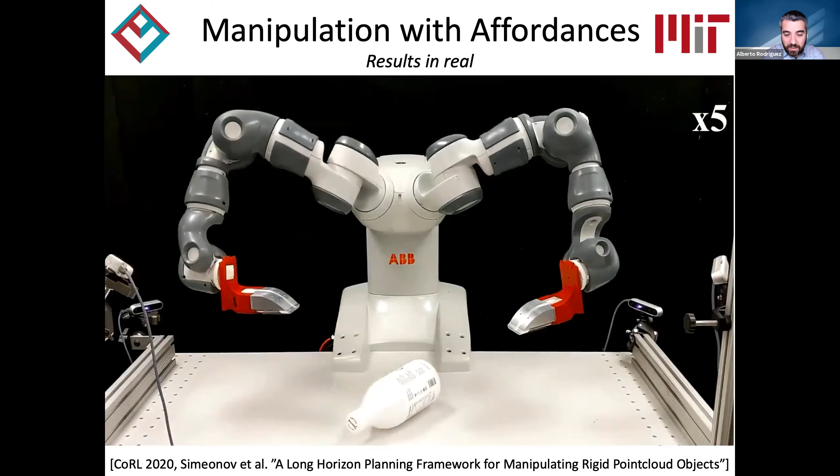Alberto? Yep, there are a few interesting questions. All right, I don't know what your time plan is.